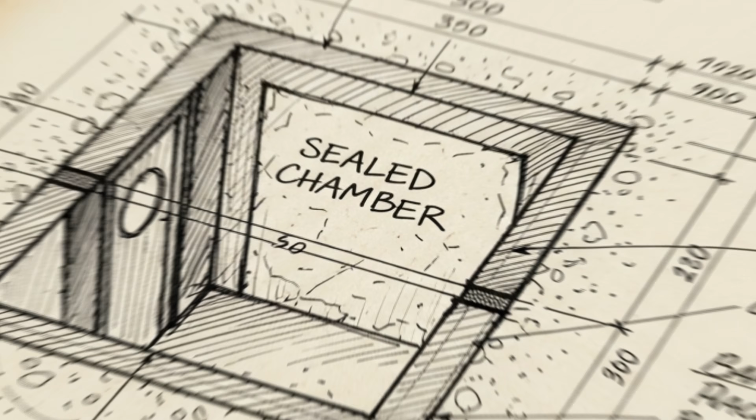Rain drummed against the small basement window as she pulled a second ledger, this one from 1873, which showed the same address with a different annotation. Building standing, grade raised 16 feet, cellar intact. The air in the archive was cold and smelled of old paper and concrete dust. Outside, the harbor fog had rolled in thick enough to muffle the sound of traffic on Atlantic Avenue.

Boston's expansion into its own harbor remains one of the largest urban landfill projects in American history. Between 1630 and 1900, the city more than tripled its landmass, transforming tidal flats, marshes, and open water into solid ground. The official narrative describes this process as straightforward. Crews dumped gravel, broken brick, and excavated earth into the shallows, compacted the material, and built upon it. Maps from the period show the progression clearly, dotted lines indicating the original shoreline, solid boundaries marking new territory.

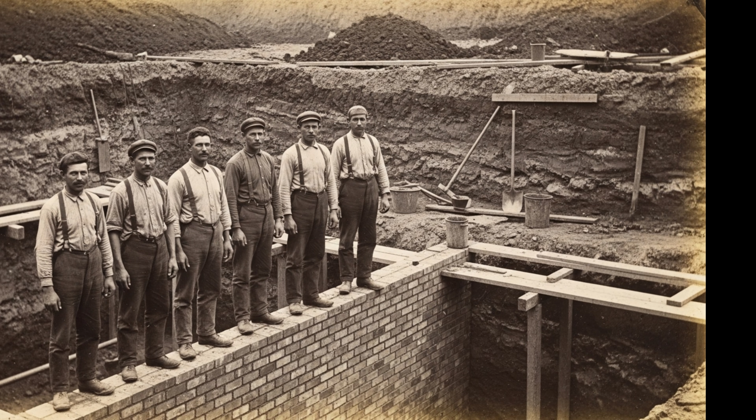Yet archival records contain persistent anomalies that suggest a more complex process, one involving not demolition but preservation, not destruction but burial. On the morning of March 12, 1806, witnesses reported seeing a three-story brick townhouse moving slowly down Tremont Street. The structure, built in 1784, had been purchased by a shipping merchant who needed the land, but found the building too valuable to demolish.

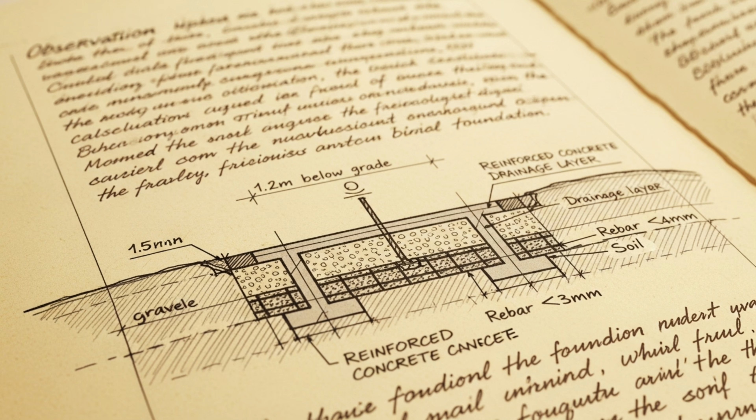Contemporary newspaper accounts describe the operation with a mixture of awe and practical detail. The house had been jacked up onto timber rollers, its foundation carefully excavated and reinforced, its route cleared of obstacles. It took 11 days to move the structure 4 blocks.

What the accounts do not mention, what appears only in a surveyor's private notebook discovered in 1923, is what happened to the original foundation. The surveyor's sketch shows the cellar walls left standing, the void filled not with rubble, but with carefully placed stone, the grade raised around it to match the street level. A marginal note reads, "Foundation chamber sealed, access via coal chute preserved for owner's use."

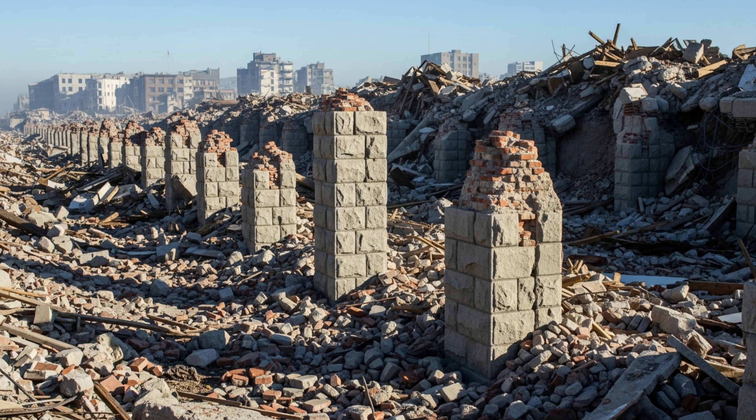This pattern repeats throughout Boston's expansion records. Buildings relocated, foundations left intact, grade raised. The practice had precedent in European cities where medieval structures were gradually buried by rising street levels, creating underground chambers that persisted for centuries. In Boston, however, the process was deliberate and systematic.

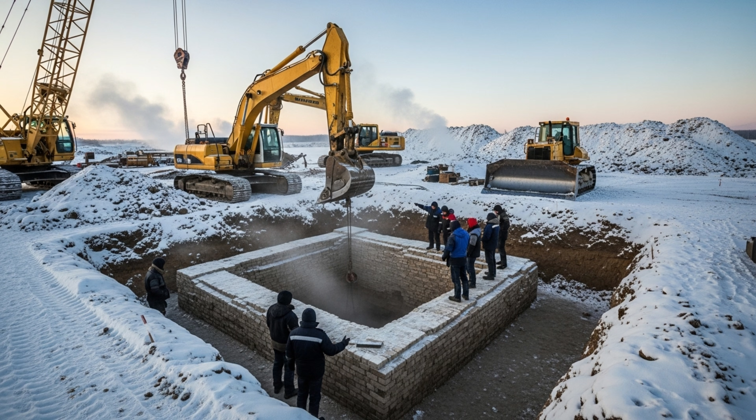Between 1800 and 1880, more than 200 significant structures were relocated rather than demolished, and in at least 60 documented cases, the original foundations remained in place beneath the new grade. The reasons varied: structural integrity, property rights, storage access, but the result was the same: a hidden layer of intact architecture beneath what official records describe as simple landfill.

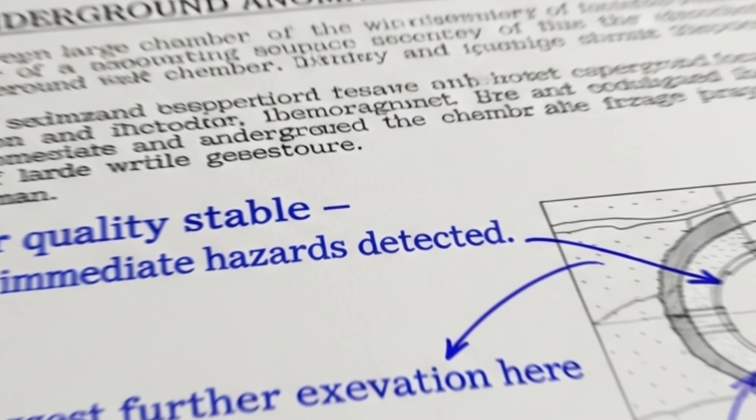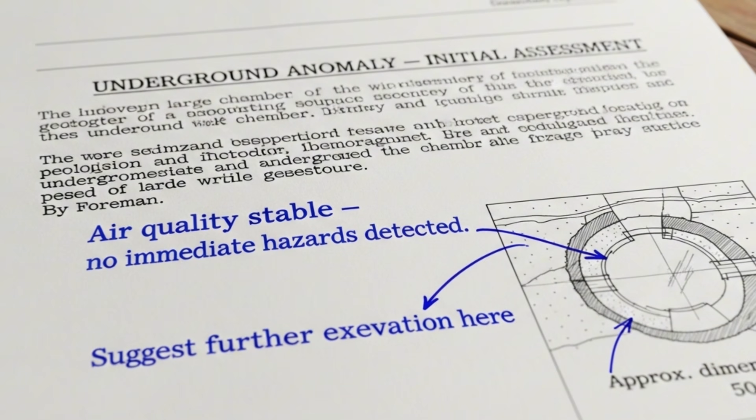By June of 1858, the filling of the Back Bay had begun in earnest. The project would take 30 years and consume 2.5 million cubic yards of material. Gravel trains ran around the clock, dumping loads of sand and stone excavated from Needham Heights, 9 miles away. The official engineering reports, preserved in leather-bound volumes at the Boston Public Library, describe the fill composition in detail: gravel, clay, broken stone, some brick rubble from demolition sites.

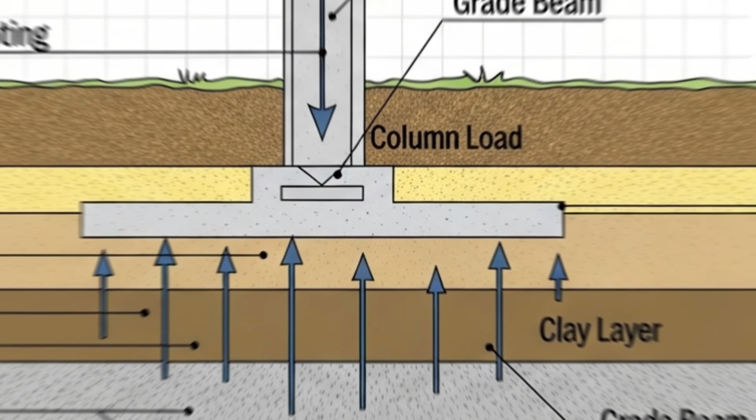Yet photographs from the period show something unexpected. In one image, dated August 1862, workers stand atop what appears to be an intact brick wall rising from the fill, its corners sharp, its mortar joints visible. The wall runs parallel to the planned street grid. In another photograph, taken 6 months later from nearly the same position, the wall has vanished beneath an additional 8 feet of fill. No mention of these structures appears in the engineering reports.

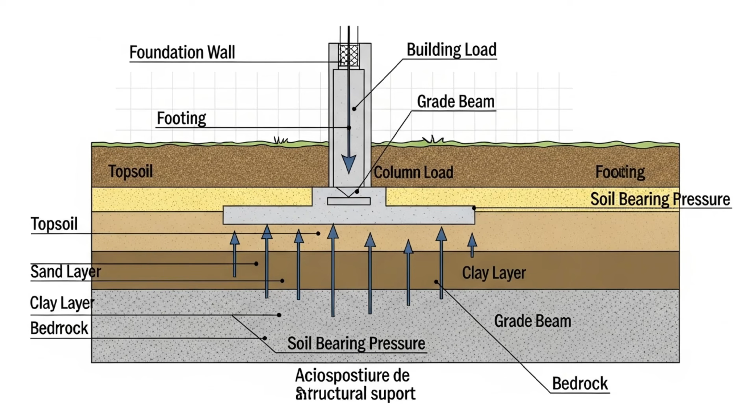A civil engineer named Samuel Whitmore kept a private journal during his work on the Back Bay project. The journal, donated to the Massachusetts Historical Society in 1904, contains sketches and measurements that do not match official plans. On one page, dated October 14, 1863, Whitmore describes encountering a substantial foundation of cut stone, dimensions approximately 30 by 40 feet, depth to bedrock 12 feet, condition excellent.

He notes that the project supervisor ordered the structure left intact, the fill placed around and over it, the surface graded level. Whitmore's sketch shows the foundation in cross-section, its walls thick and carefully constructed, its interior space empty. He writes, "Purpose unknown. Depth suggests commercial cellaring or storage. Left accessible via timber shaft sealed at grade." The next page has been torn out.

The practice was not unique to Boston. In Chicago, after the catastrophic fire of 1871, the city raised its grade by as much as 14 feet, leaving older structures partially buried. Photographs show buildings with their ground floors converted to basements, new entrances built at what had been second-story windows.

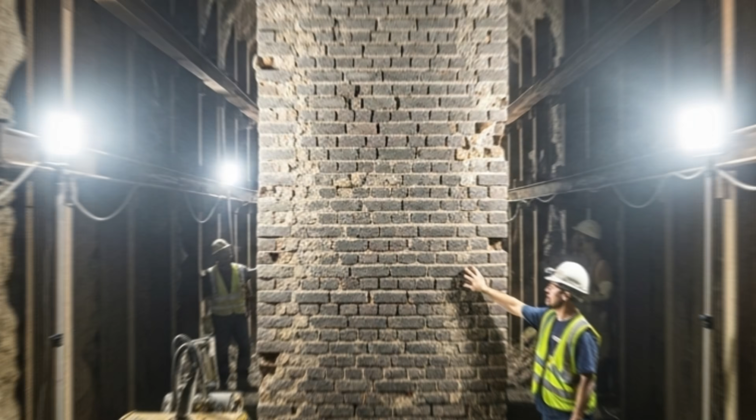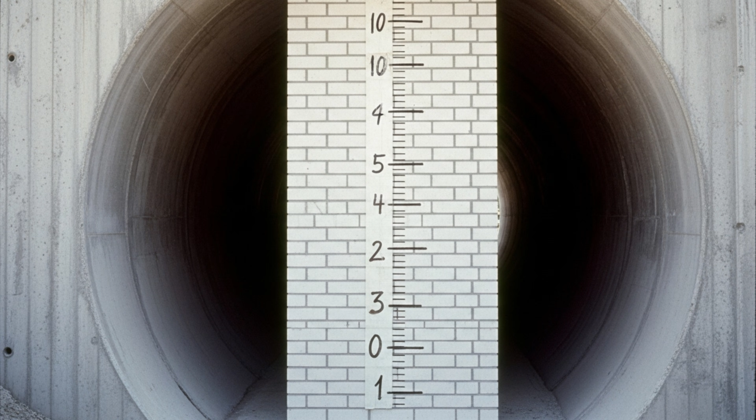Some property owners excavated their old cellars and continued using them as subterranean storage. In San Francisco, after the 1906 earthquake, debris from destroyed buildings was used as fill for the waterfront, but photographs reveal intact foundations left standing in the rubble, their walls rising above the fill line before being covered by additional material. The pattern suggests a widespread 19th century practice. Rather than demolish substantial foundations, engineers incorporated them into the new grade, creating a hidden substratum of architecture.

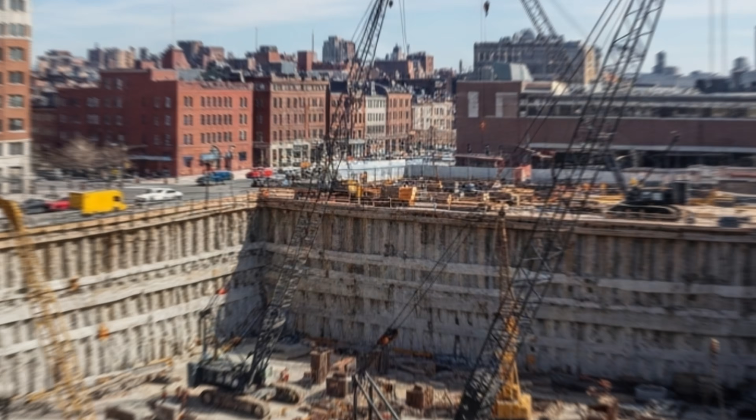On a cold morning in December of 1895, construction workers excavating for a new building on Boylston Street broke through into a void. Their foreman's report, filed with the city building department, describes a chamber of brick construction, approximately 20 feet square, ceiling height 8 feet, walls intact and dry, no obvious entry point from surface. The chamber contained empty wooden crates, iron hooks mounted in the walls, and a stone floor worn smooth in pathways between the door and the chute.

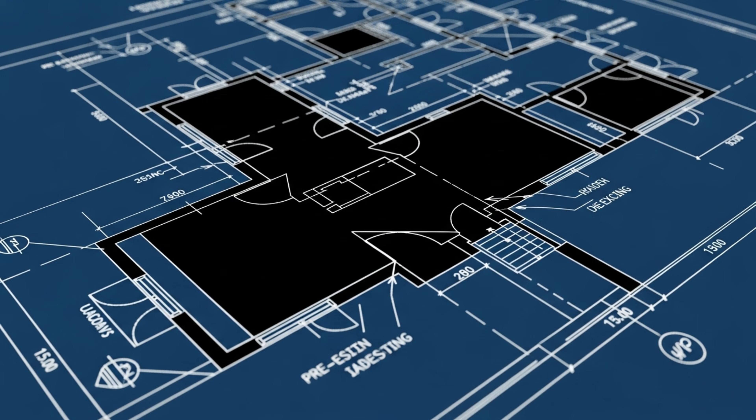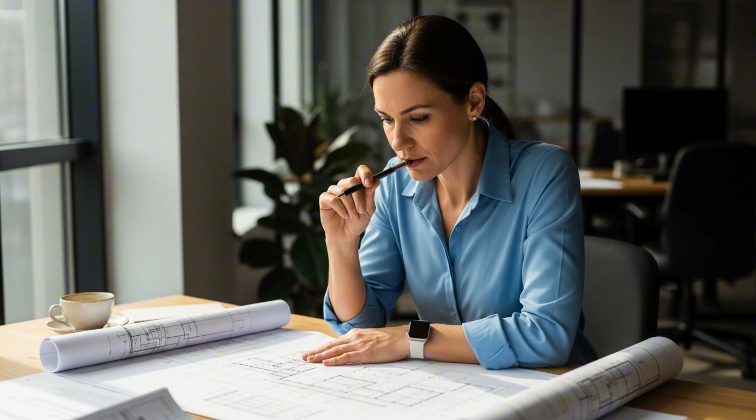Between 1890 and 1920, as Boston's building boom continued, construction crews reported at least 19 similar finds. Intact chambers, sealed cellars, foundation rooms with no apparent connection to surface structures. Some contained artifacts, bottles, tools, furniture, suggesting they had been used after burial, accessed through shafts or tunnels that were later sealed. Others were empty, their walls bare, their purpose unclear. In most cases, the chambers were filled with concrete or rubble and forgotten. In a few instances, they were incorporated into the basements of new buildings, their origins unrecorded.

The technical advantages of preserving foundations are straightforward. A substantial stone or brick foundation provides structural stability, reducing settling and improving load distribution for new fill material. In areas with high water tables or soft underlying soil, conditions prevalent throughout Boston's lowlands, existing foundations act as pilings, transferring loads to bedrock or firmer strata. Engineering handbooks from the period acknowledge this principle, though they rarely discuss its implementation.

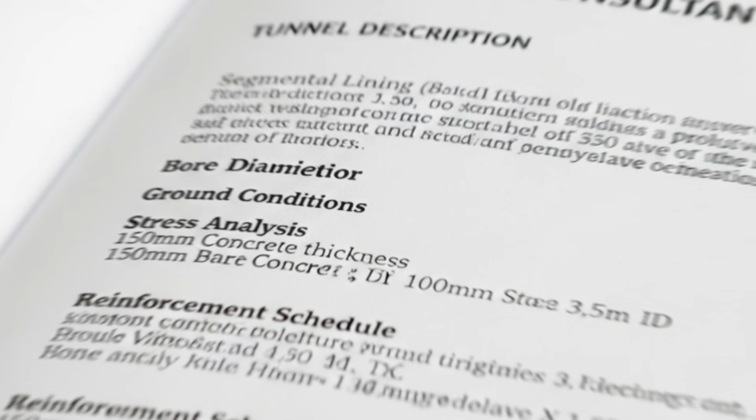The practice saved time and resources. Demolishing a well-built foundation required significant labor and explosives, while leaving it intact cost nothing and improved the structural integrity of the fill. Yet the pattern of preservation extended beyond mere engineering efficiency. Property records from the period show that many foundation sites retain their original lot lines even after burial, suggesting that legal ownership of the subsurface continued despite the surface being developed for different purposes.

In several cases, deeds include clauses granting subsurface access rights to the original property owner or their heirs, permissions that remained legally valid even as the surface ownership changed hands. One such deed, dated 1879, grants access to the cellar and foundation chambers lying beneath the present grade on Lot 47, Back Bay, accessible via shaft to be maintained by grantee. The location of the shaft is not specified.

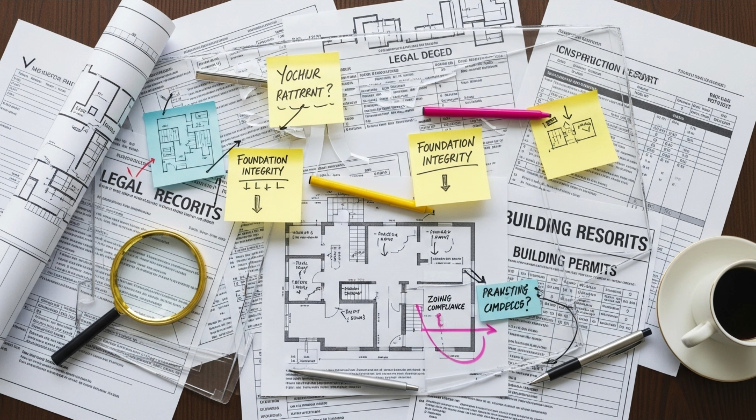By the winter of 1912, the filling of much of central Boston was complete. The city's waterfront had moved outward by as much as a quarter-mile in some areas. Hundreds of buildings stood on land that had been tidal flats or open water 70 years earlier. Beneath them lay the buried remains of earlier Boston, foundations, cellars, walls, and chambers sealed beneath tons of fill. Some were known and documented. Others existed only in fragmentary records, survey notes, private journals, crossed-out entries in official ledgers. A city inspector writing in 1915 estimated that perhaps one structure in 10 built upon made land overlies some remnant of previous construction. He offered no source for this estimate.

Photographs from the period show workers excavating for subway tunnels beneath the filled districts. In several images, the tunnel walls reveal cross-sections of the fill, layers of sand and gravel, lenses of clay, and occasional inclusions of worked stone or brick that appear too regular to be rubble. In one photograph, dated April 1917, a brick wall runs perpendicular to the tunnel excavation, its face clean and its mortar intact. The tunnel was routed around it. No official explanation appears in the construction reports.

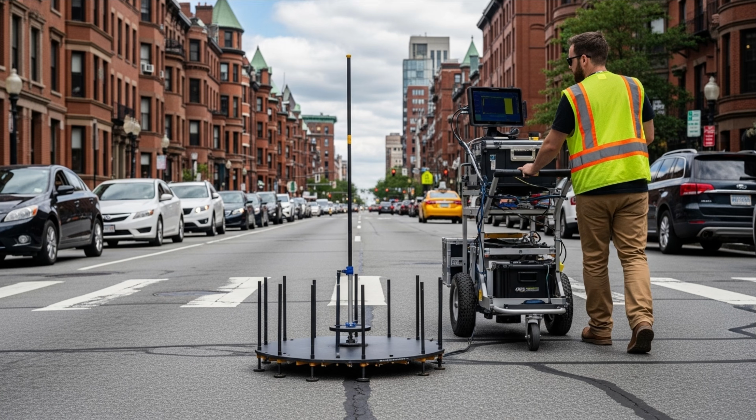The practice of incorporating older foundations into new construction continued into the 20th century. During the construction of the Prudential Center in the early 1960s, excavation crews encountered what project documents describe as pre-existing masonry structures of unknown origin, at depths ranging from 12 to 24 feet below grade. Geotechnical reports noted that these structures were well constructed and structurally sound, and recommended incorporating them into the building's foundation system. Blueprints show several of these structures as solid black rectangles in cross-section, their interiors and construction dates unspecified. The building was completed in 1964.

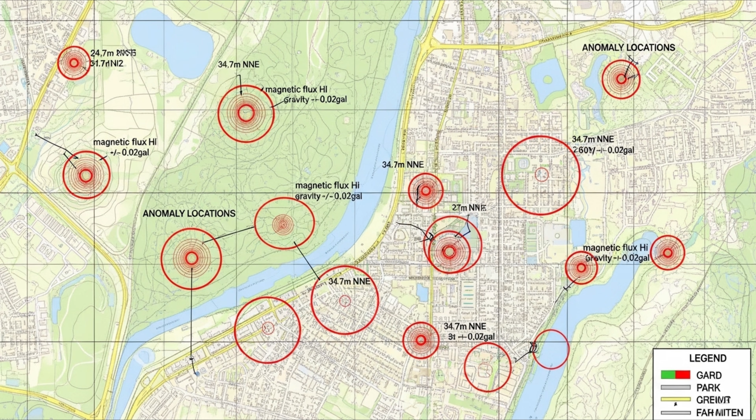A structural engineer reviewing those documents in 1998 remarked in a professional journal article that the practice of building upon, rather than through or around, unknown subsurface structures represented a significant deviation from modern engineering standards, which require complete knowledge of subsurface conditions. He noted that seismic codes and foundation design principles assume homogeneous or predictable subsurface conditions, not the presence of intact but undocumented architecture.

Yet in cities built on landfill, he observed, such structures are common, their existence known to excavation contractors but rarely recorded in official building documents. He concluded, what lies beneath our cities is often more than geology.

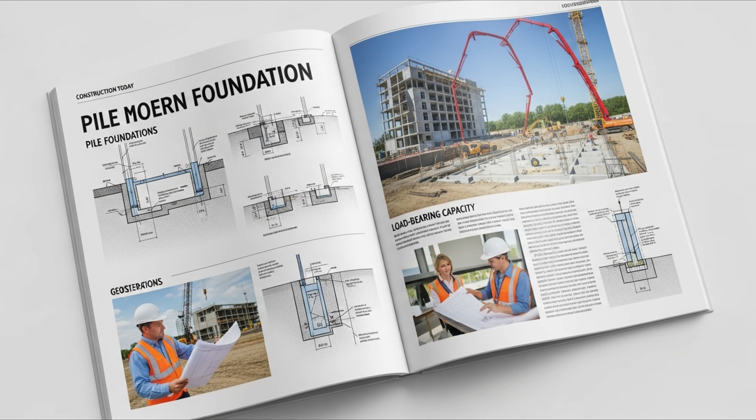On a humid afternoon in July of 2003, during renovation work on a 19th century building on Beacon Street, construction workers removing a section of basement floor discovered a brick archway leading downward. The arch was well constructed, its keystone precisely cut, its passage descending at a gentle angle into darkness. The workers notified their supervisor, who contacted the building owner. A structural consultant was brought in to assess the safety of the discovery.

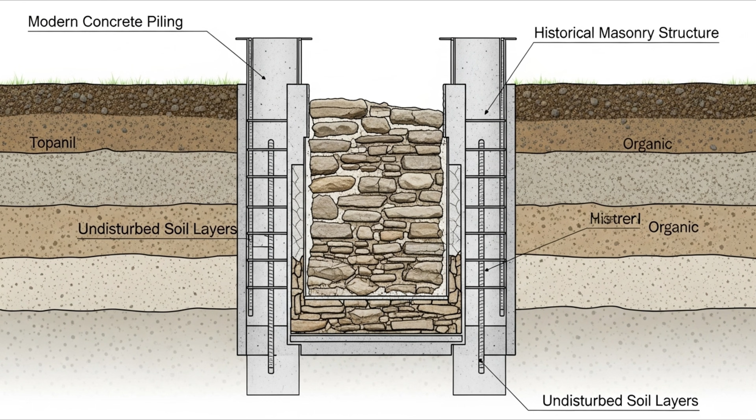His report, filed with the city, describes a tunnel approximately 4 feet wide and 6 feet high, extending at least 50 feet beyond the building's foundation, before terminating in a sealed brick wall. The tunnel walls were dry, their mortar intact. The floor showed wear patterns suggesting foot traffic. The consultant recommended sealing the opening, which was done. No further investigation was conducted.

This discovery prompted renewed interest in Boston's subsurface history. A group of amateur historians and urban explorers began compiling reports of similar finds. Sealed passages, buried chambers, foundations that extended far beyond the footprints of surface buildings. They cross-referenced property records, construction reports, and archival photographs. Their findings, published informally online, suggested a network of subsurface structures far more extensive than official records acknowledged.

Critics dismissed the claims as speculation, noting that the sources were fragmentary and the interpretations ambiguous. Yet, the basic facts remained undisputed. Substantial intact structures existed beneath Boston's streets, their number and extent unknown. The technical term for such structures is inclusions, foreign objects embedded in fill material. Engineering textbooks discuss inclusions primarily as problems, buried debris that can shift or decay, creating voids and instability.

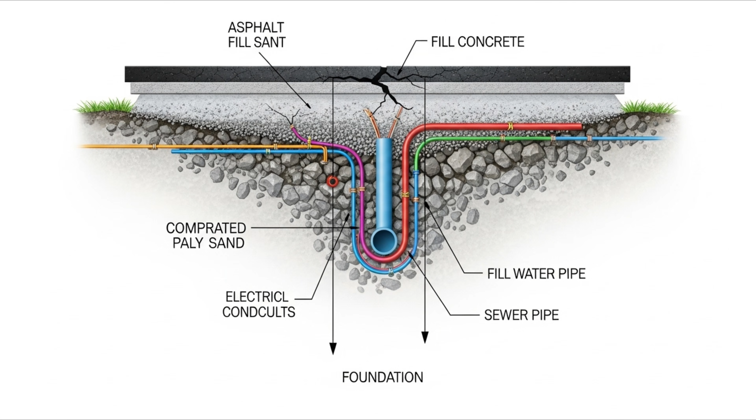Yet the inclusions beneath Boston are not debris. They are architecture, intentionally preserved, their structural integrity maintained. The distinction matters. Debris settles and compresses, redistributing loads unpredictably. Architecture, properly constructed, remains stable, its load paths defined, its response to stress predictable. A buried foundation, if well built, can support overlying fill more effectively than unstructured material. The engineers who buried Boston's foundations understood this.

By the autumn of 2019, ground-penetrating radar and other subsurface imaging technologies had become routine tools in urban archaeology and construction planning. Several studies applied these technologies to Boston's filled districts, attempting to map the subsurface in detail. The results were fragmentary. Radar signals penetrate poorly through heterogeneous fill, but suggestive. Regular geometric anomalies appeared at depths consistent with pre-fill ground levels. Some matched known foundation locations, others did not.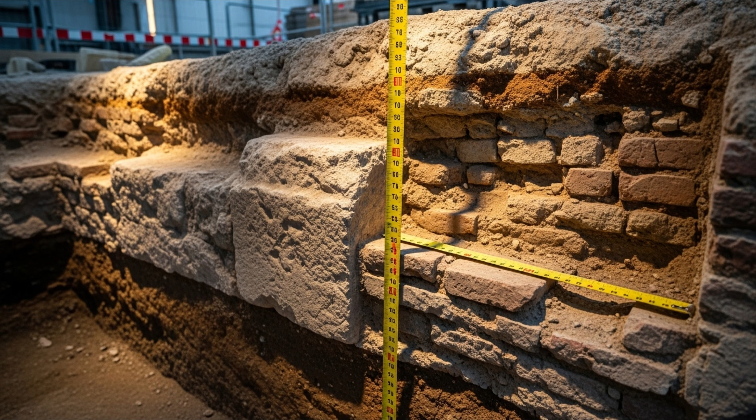One survey, conducted along a 2-block stretch of Boylston Street, identified 7 distinct rectilinear structures between 12 and 18 feet below the surface, none corresponding to documented building sites. The researchers noted that without excavation, the nature of these structures could not be confirmed, and that excavation was not economically or legally feasible. Their report concluded, the subsurface of Boston contains architectural elements whose extent and purpose remain largely unknown.

A civil engineer reviewing this report in a trade journal remarked that modern construction practices inadvertently preserve such structures. Deep foundations for contemporary buildings, steel pilings or concrete caissons driven to bedrock, typically bypass shallow subsurface structures entirely, leaving them intact in the soil between foundation elements. Unless excavation extends across the entire building footprint to bedrock, buried architecture remains undisturbed. The result is a hidden layer of historical construction sealed beneath the modern city, inaccessible but intact, forgotten but present.

On a cool October morning in 2023, a commuter pauses on the corner of Boylston and Clarendon, waiting for a signal. The street surface is asphalt, worn smooth by traffic, patched and repatched over decades. Beneath it lies concrete, and beneath that, layers of fill, gravel and sand and broken stone, deposited over decades, compacted by the weight of the city above. And beneath that, perhaps, a foundation.

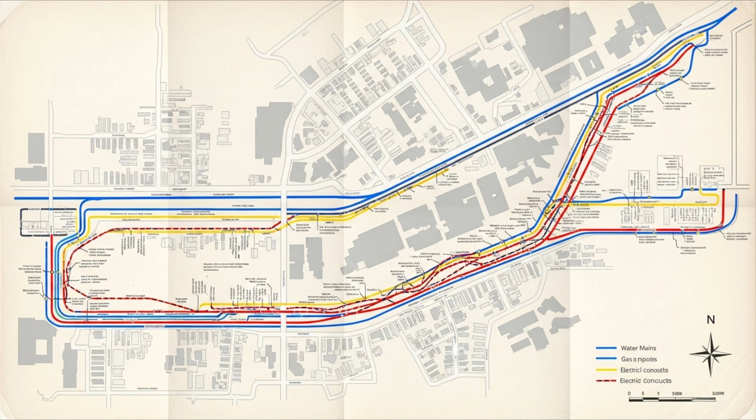Its walls are brick, carefully laid, their mortar still intact. Its interior is dark and still. Its purpose, if it ever had one, has been forgotten. The signal changes. The commuter crosses the street. Above, traffic flows. Below, in the sealed spaces between geology and pavement, history waits, preserved not by intention but by the weight of everything built since.

If landfill is defined as the burial of waste, then Boston's expansion is something else entirely. It is the burial of architecture, the creation of a city with 2 levels, one visible, occupied, documented, and one hidden, empty, forgotten. The modern city knows the first level intimately. Every building cataloged, every street mapped, every utility line recorded. The second level exists in fragments, archival anomalies, construction reports, accidental discoveries.

Maps do not show it. Surveys do not capture it. It persists beneath the surface, a parallel city of foundations and chambers, accessible only through chance and excavation, known only through inference and contradiction. The records do not align. The photographs show more than they should.

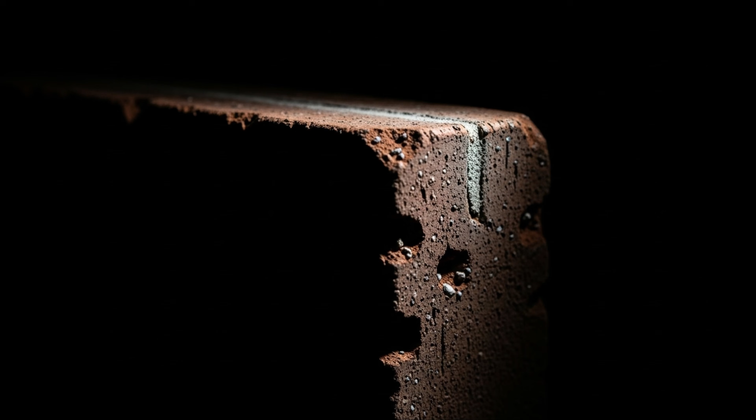The excavations reveal structures that official plans do not predict, and beneath the asphalt and concrete, in the spaces between water table and bedrock, something remains, not rubble, not waste, but rooms. Their walls are intact, their floors are level, they were built to last, and they have. History does not always mean remembering. Sometimes it means burial, sometimes it means preservation through forgetting. If the past is another country, buried beneath Boston is another city, waiting in darkness, its streets and cellars sealed beneath the weight of time and fill and the city that rose above it, unaware.